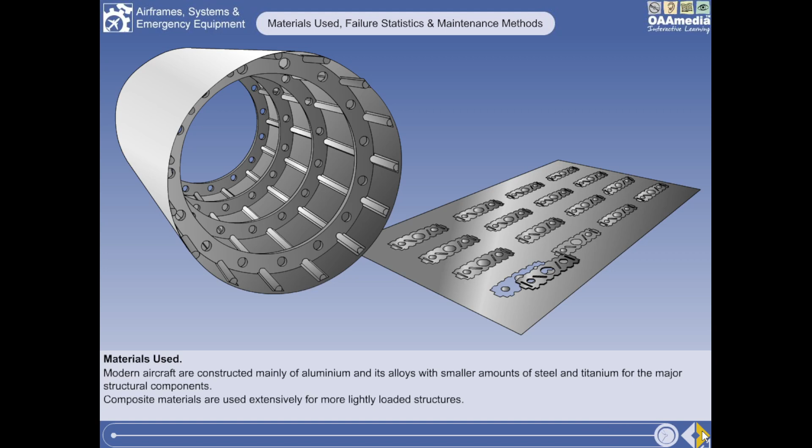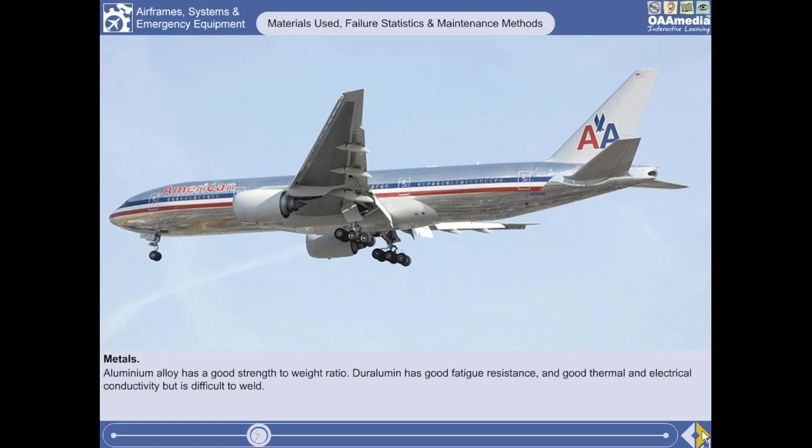Aluminium alloys are the most widely used metals for structural use due to them having a good strength to weight ratio. Duralumin is an aluminium and copper-based alloy which has poor corrosion resistance except when clad with pure aluminium. It has good thermal and electrical conductivity and good fatigue resistance, but it is difficult to weld. Aluminium-clad duralumin is the most popular material in use for airliner skins.

Steel and its alloys are relatively heavy, but can be made very strong. They are used only where strength is vital and weight can be ignored, for instance, in undercarriage units.

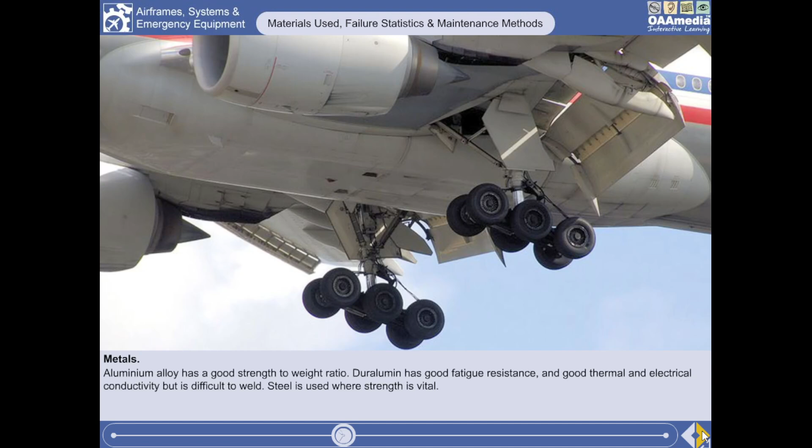Titanium is much lighter than steel, but it is just as strong and can be used where fire protection is required, for instance in engine firewalls. Titanium has good strength, and it retains this strength and its corrosion resistance up to temperatures of 400 degrees Celsius. It is, however, expensive to produce.

The SR-71 Blackbird was the first aircraft to make extensive use of titanium within its structure, paving the way for its use in modern fighter and commercial aircraft. The Boeing 777 uses some 58 tons of titanium in its construction.

Magnesium alloys are also used, their principal advantage being weight. Magnesium alloy has an excellent strength to weight ratio, aluminium of the same strength being 1.5 times heavier. Magnesium alloy has poor elastic properties, so its use in primary structures is limited. It is often used in the construction of gearboxes.

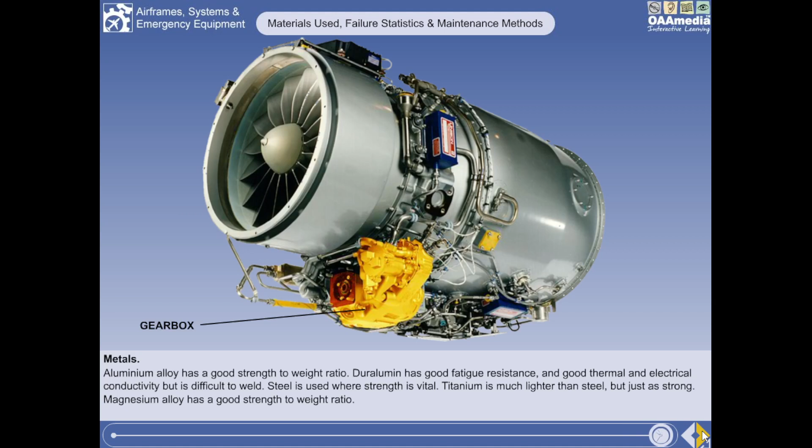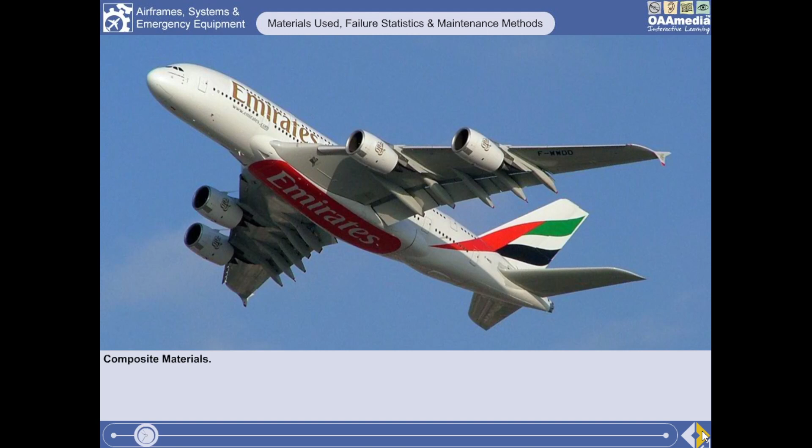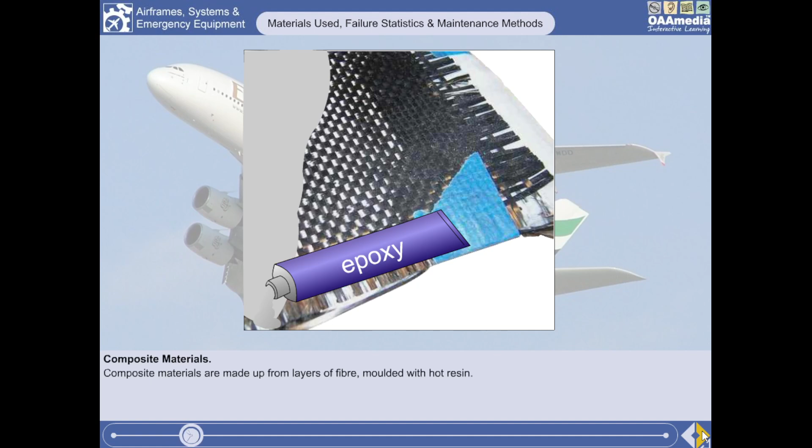Composite materials are becoming more and more used in aircraft construction. They are made up from layers of fibre, carbon, glass or Kevlar, moulded into the required shape with a hot plastic resin, which is normally epoxy.

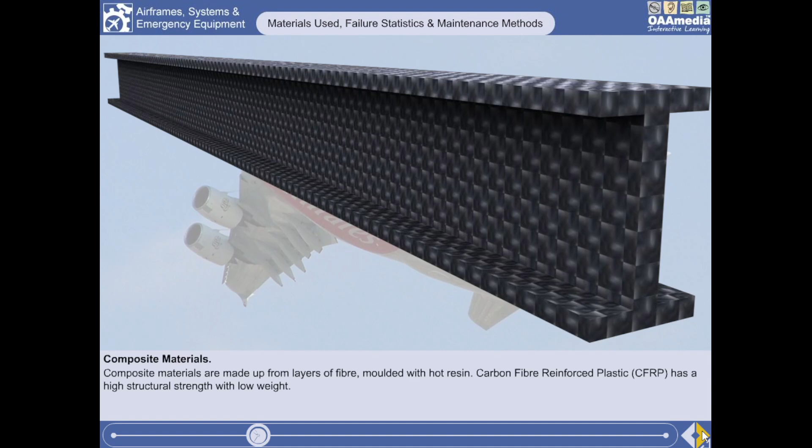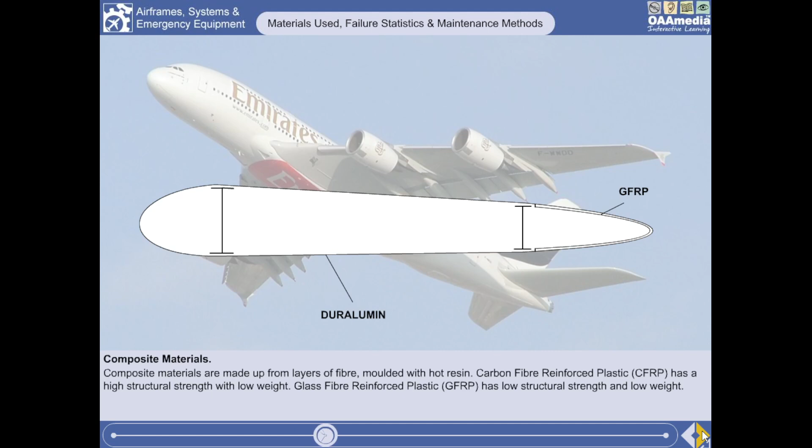Carbon fibre reinforced plastic is used where structural strength is required. It can be produced with the same strength as an aluminium alloy, but with a weight saving of about 20%. Glass fibre reinforced plastic does not have the same structural strength, but is often used for fairings and non-load-bearing panels because of its light weight.

Kevlar has very low electrical conductivity and high fire resistance. Aircraft cabin doors, overhead bins, and bulkheads may be built with honeycomb cores made up of Kevlar.

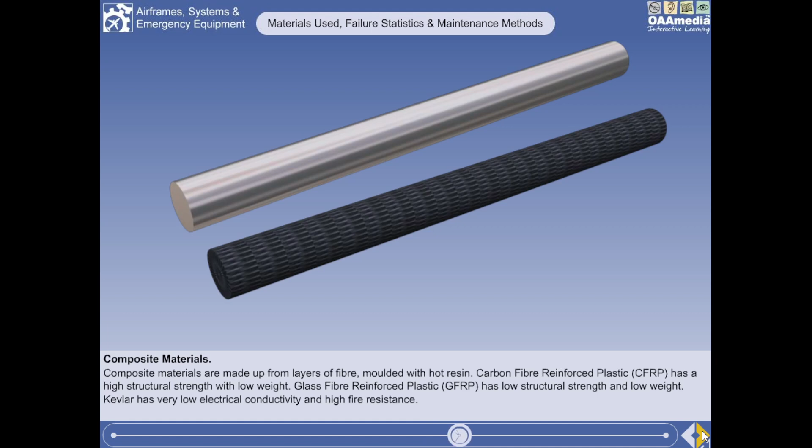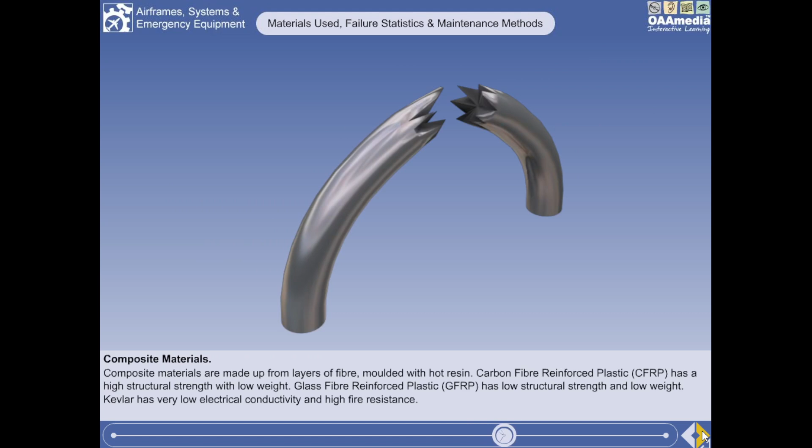Composite materials have good resistance to corrosion and can be easily formed into complex shapes, but their fatigue behavior is different to that of conventional metal alloys. Metal structures suffering fatigue retain their design strength up to a critical point, after which failure occurs very rapidly, whereas composites lose their properties gradually.

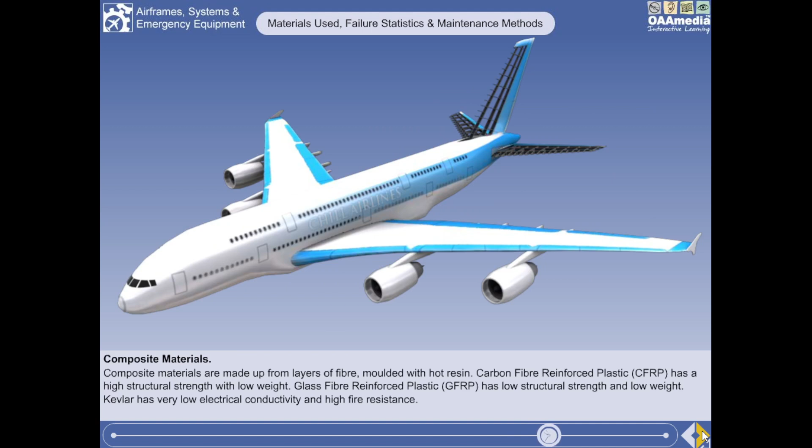Interest in composites for structural use is due to their high specific strength and specific stiffness allied with their ability to retain these properties at high temperatures. The Airbus A380 uses a significant amount of composite material in its construction. The tailplane, for instance, is almost entirely constructed from carbon fiber reinforced plastic.

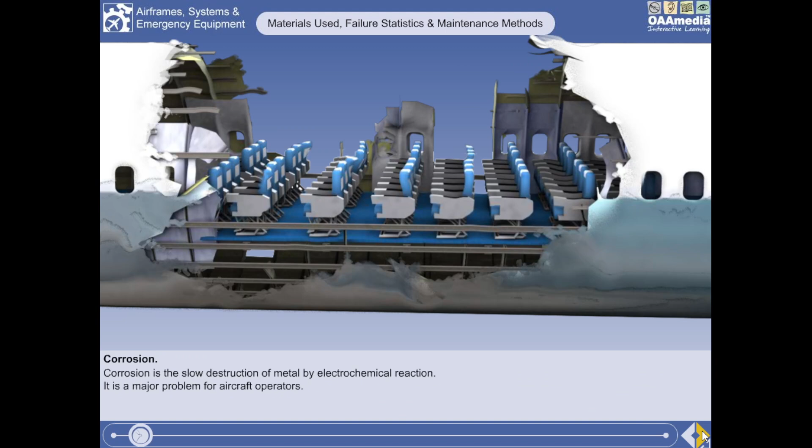Corrosion is the slow destruction of metal by electrochemical reaction. It is one of the most persistent defects found in aircraft. Rectification of advanced corrosion has been known to take thousands of man-hours. In fact, more than 10% of engineering downtime is spent in dealing with corrosion problems. It is therefore essential that it is recognized at the earliest possible stage, and that effective preventative measures are taken.

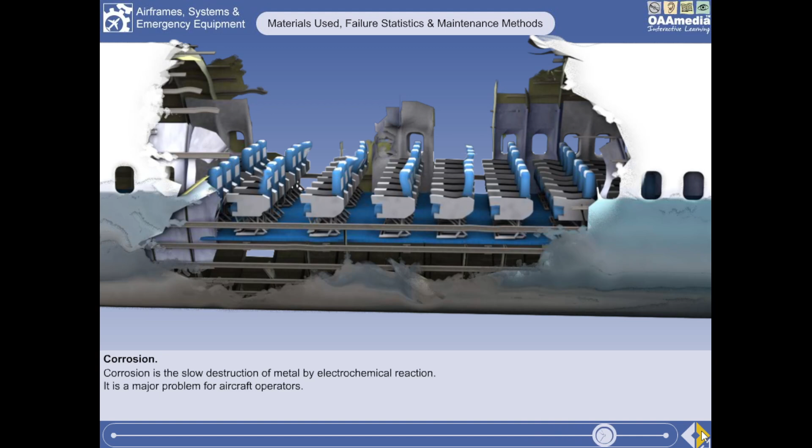When a metal is exposed to the air, oxygen in the air reacts with the bare metal to form an oxide film which adheres to the metal surface. This oxide film forms a barrier between the air and the metal surface, which can protect the underlying metal from further attack.

A good example of this is the Statue of Liberty. It is clad in copper. This has developed a green copper oxide coating which protects the metal from the elements.

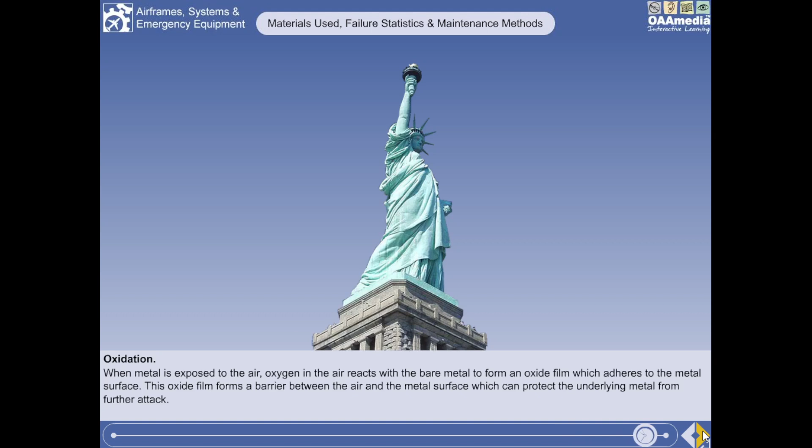With the exception of oxidation, all other corrosion takes place when the metal is in contact with water, either as a liquid or as water vapor in the atmosphere. Corrosion is mainly electrochemical in character and occurs in conditions that permit the formation of minute electrical cells in or on the attacked metal in the presence of an electrolyte.

It will also occur when a difference in potential exists between the different constituents of an alloy, or where dissimilar metals are in contact with each other.

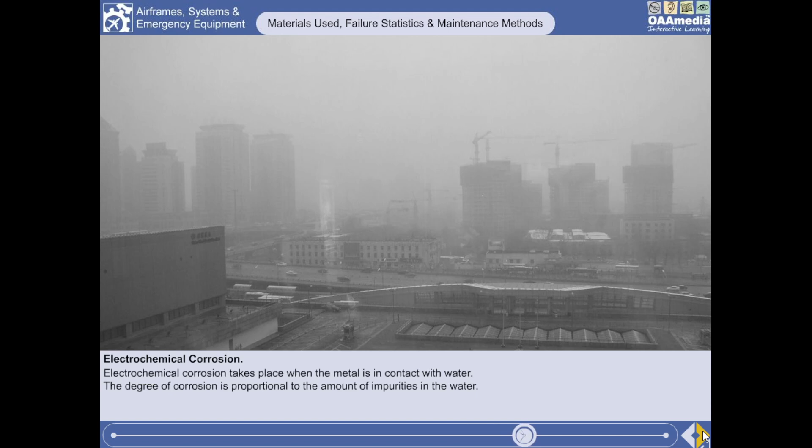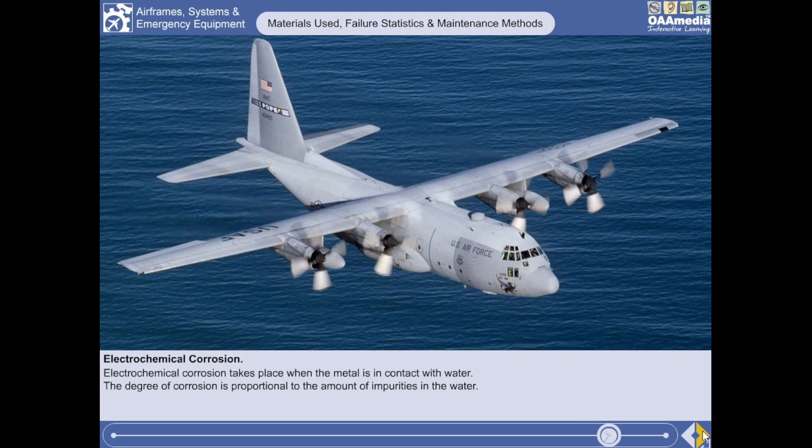The degree of corrosion is proportional to the amount of impurities in the water, the impurities being due to industrial pollution which has high sulfur content, or by airborne salt particles when operating over the sea. The resultant action is that the metal undergoes a chemical change.

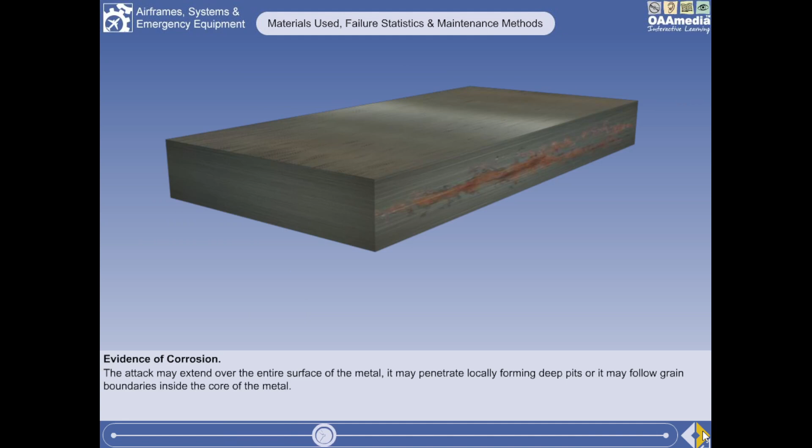The attack may extend over the entire surface of the metal, or it may penetrate locally, forming deep pits, or even follow grain boundaries inside the core of the metal. The weakening effect can be aggravated by stresses in the metal due to external loads, or there may be residual stresses from the manufacturing process or method of assembly.

The three types of corrosion that we are going to look at are surface corrosion, intergranular corrosion, and stress corrosion.

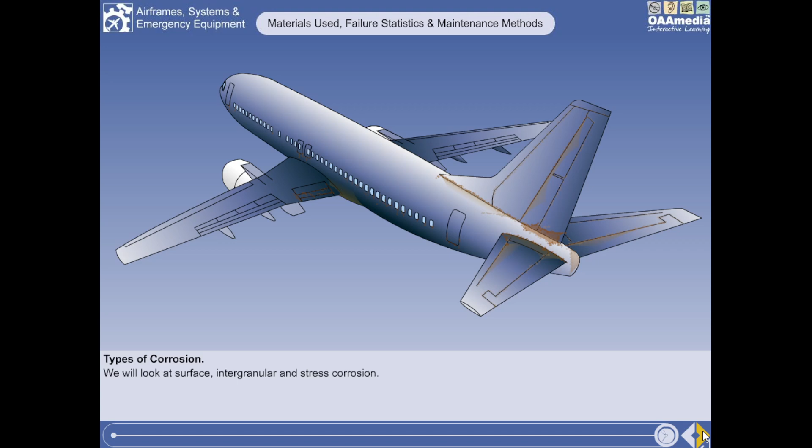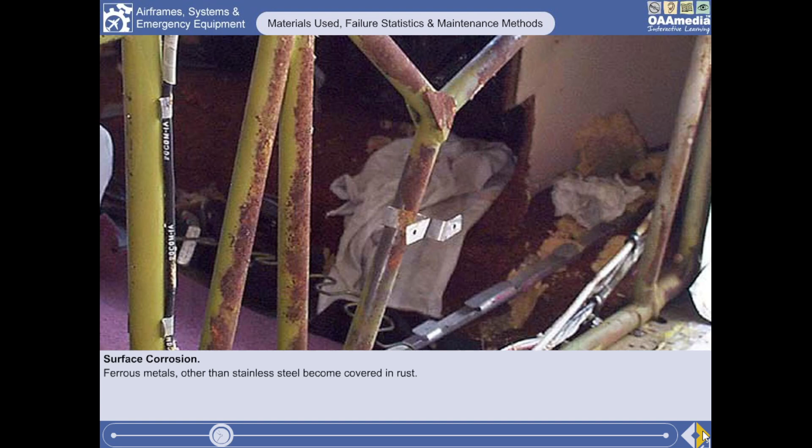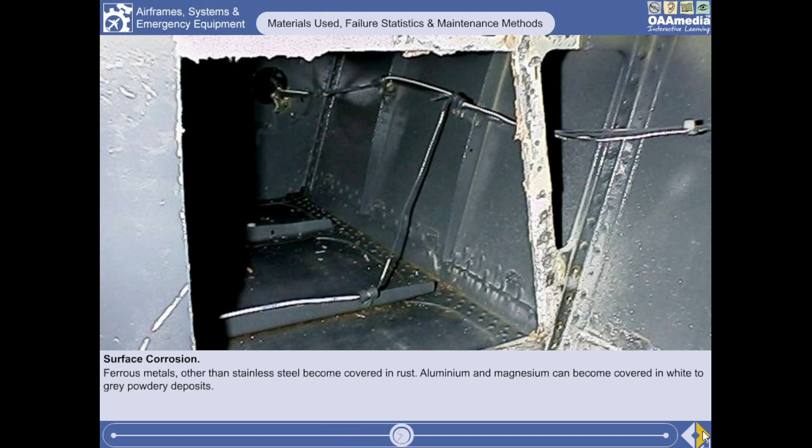The surface corrosion on ferrous metals, other than stainless steel, can be recognized as a reddish-brown powder, commonly known as rust. The surface of aluminium or magnesium can become covered in white to grey powdery deposits. On magnesium, there may also be deep pitting of the surface. The surface of copper and its alloys may become covered in blue-green salt deposits.

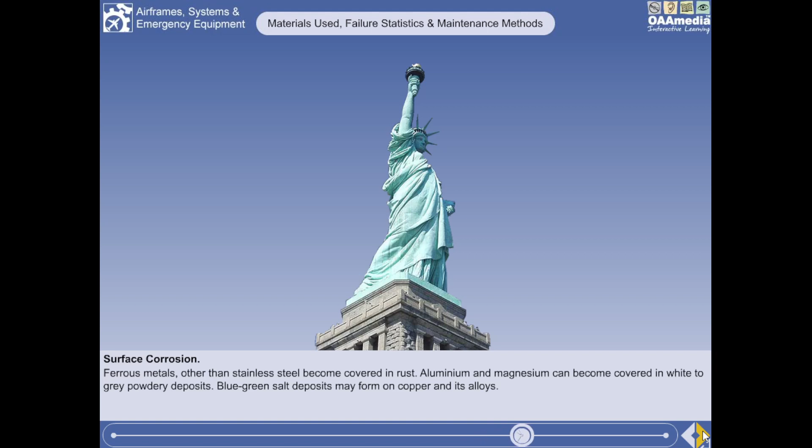Surface corrosion is the least damaging. It is relatively easy to spot, so it can be identified and dealt with at an early stage.

The microstructure of metals and alloys is made up of crystals or grains, separated by grain boundaries. Intergranular or intercrystalline corrosion is a localized attack along the grain boundaries, or immediately adjacent to grain boundaries, while the bulk of the grains remain largely unaffected. It penetrates the core of the metal along the grain boundaries. The rate of attack is not limited by the lack of oxygen and is accelerated if applied or residual stresses are present.

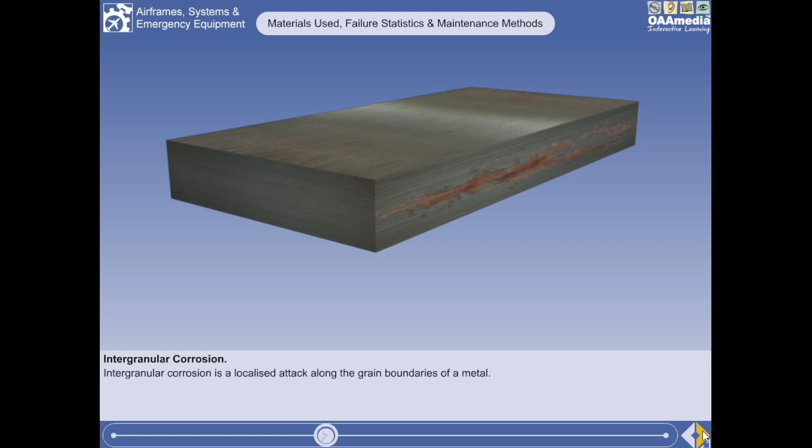Repeated, fluctuating stresses cause separation of the grain boundaries, accelerating the spread of corrosion. As a result, higher stress concentrations can occur in the remaining sound material, thus producing cracks which can spread, leading to component failure.

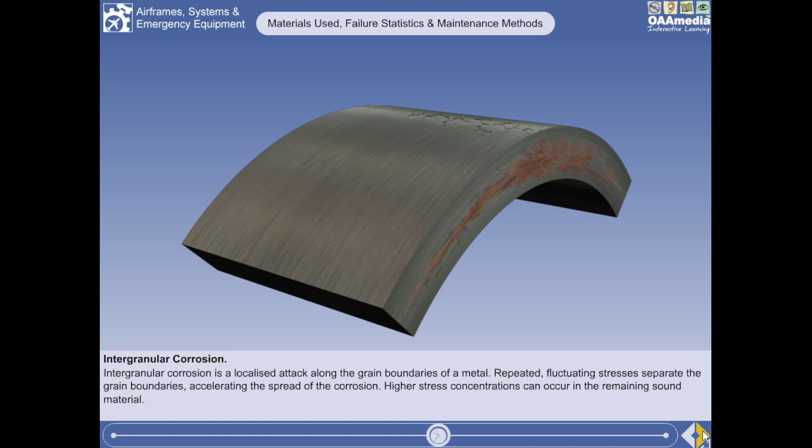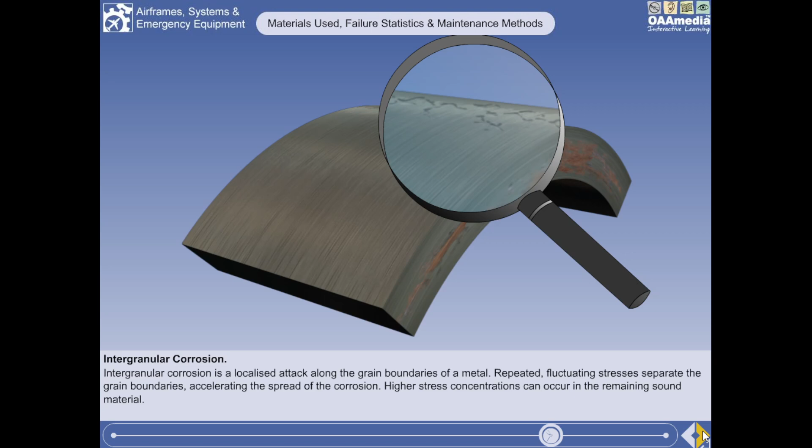This is a very dangerous form of corrosion, as detection is difficult and serious weakening can occur before any external evidence is visible. The only surface indication may be a series of hairline cracks, probably only visible through a magnifying glass.

There is no effective method of determining or of limiting the loss of strength which will occur with this type of corrosion, so when it is detected, the affected part must be immediately rejected.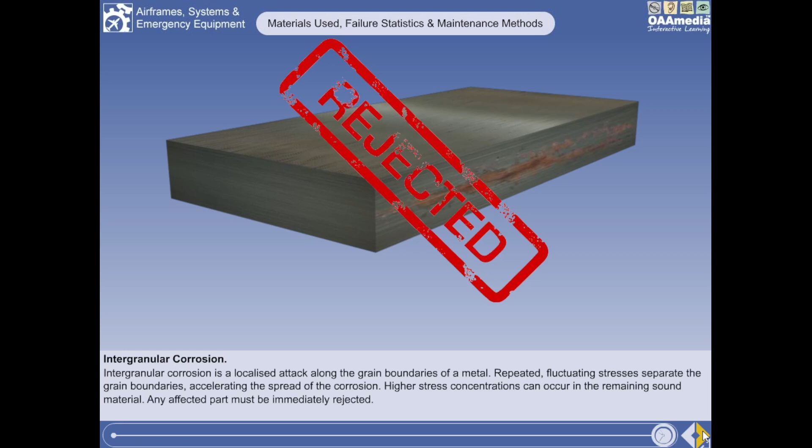A combination of a steady tensile load and corrosive environmental conditions produce a form of metal fatigue known as stress corrosion cracking. The stresses may be built in during manufacture, introduced during assembly, or may be applied during operation.

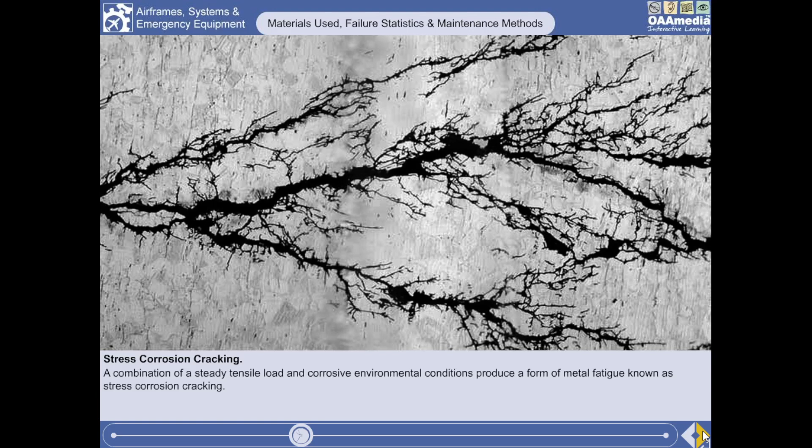Metal under stress corrodes more rapidly than unstressed metal. It usually begins with pitting at the surface. This increases the stress at the pit, causing a crack which can extend under the combined action of corrosion and load until failure occurs.

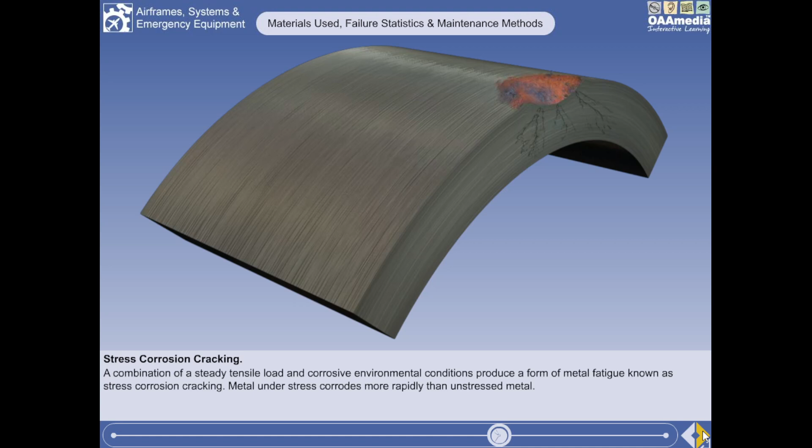There is generally very little evidence of corrosion and no apparent loss of metal. This type of corrosion is often not spotted until a serious failure occurs.

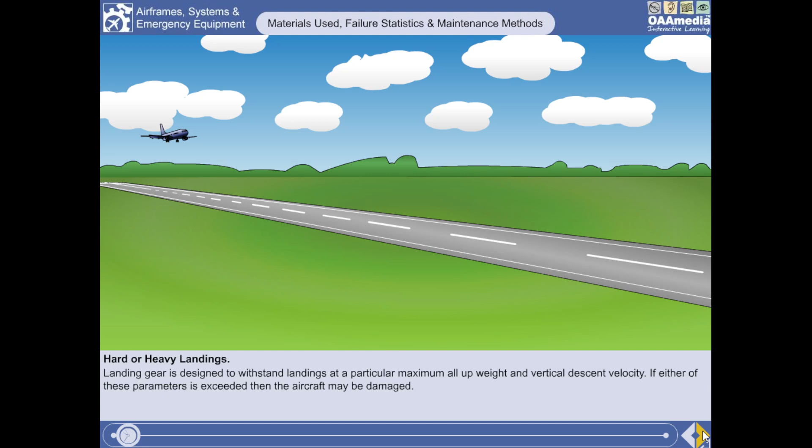An aircraft's landing gear is designed to withstand landings of a particular maximum all-up weight and a maximum vertical descent velocity of 10 feet per second or 3.05 meters per second. If either of these parameters is exceeded during a landing, then the aircraft may be damaged.

Damage may also be caused to some aircraft by landing with drift applied, or by touching down with the nose or tail wheel first.

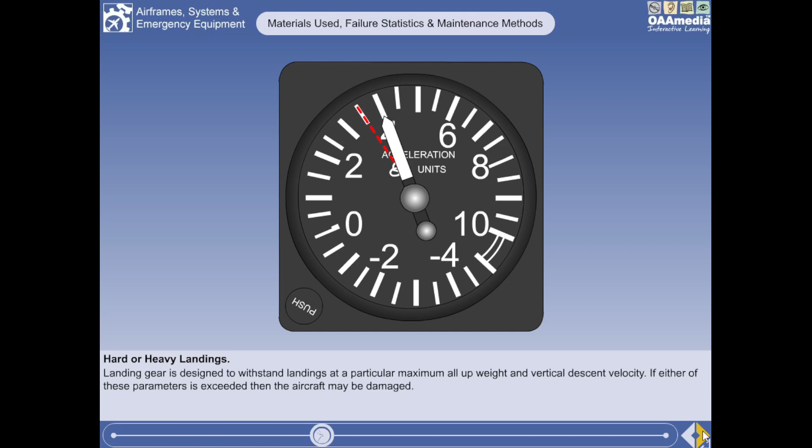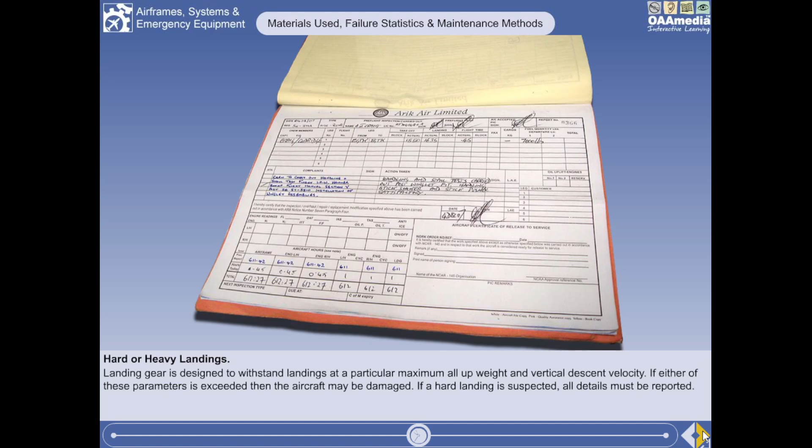Some aircraft are fitted with hard landing indicators, which give a visual indication that specific G-forces have been exceeded. But in all cases, if the crew suspect that a hard landing has been made, then all details, including aircraft weight, fuel distribution, landing speed, rate of descent, and any noises indicative of structural failure, must be reported so that an inspection can be carried out prior to the next takeoff.

The damage which may be expected following a hard landing will be concentrated around the landing gear, its supporting structure in the wings and fuselage, around the wing and tailplane attachments, and the engine mounts.

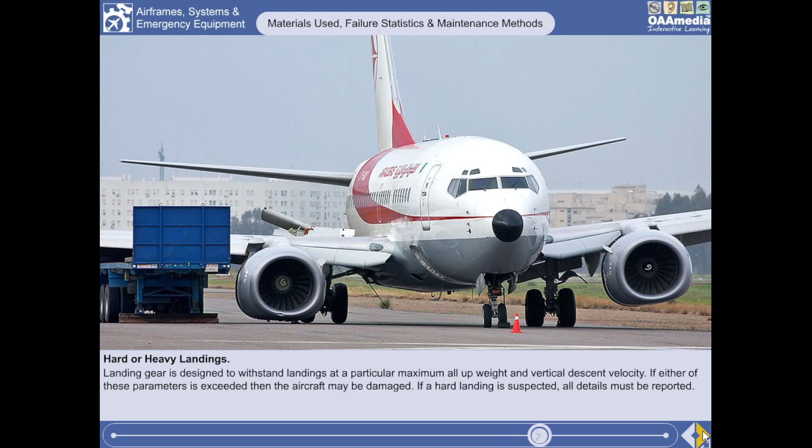Secondary damage may be found on the fuselage skin and structure, depending on the configuration and loading of the aircraft. On some aircraft, it is specified that if no damage is found in the primary areas, then the secondary areas do not need to be inspected. However, the precise inspection requirements vary from aircraft to aircraft, so reference must be made to the appropriate maintenance manual.

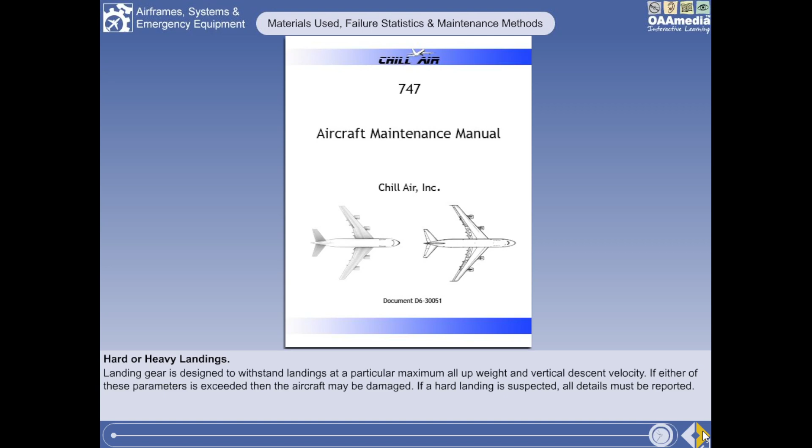It is important for pilots to have an understanding of the fail-safe concept and the way it is designed into modern aeroplanes. The following is a summary of the required relationship between component failures, their effect, and the possibility of them happening as required by the certification specifications from EASA, as detailed in CS25.

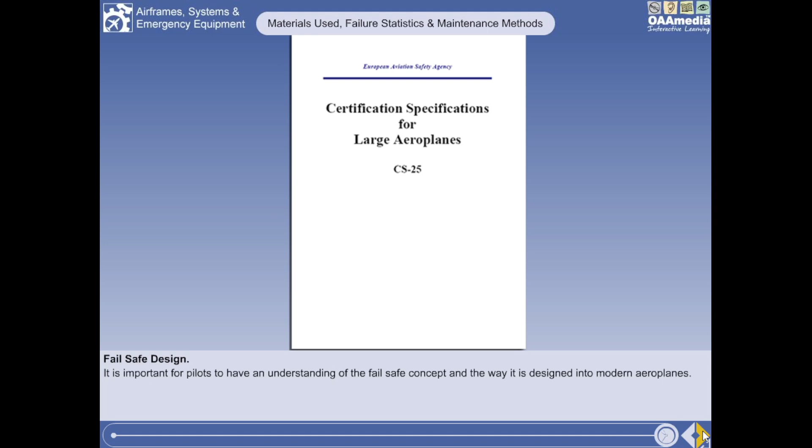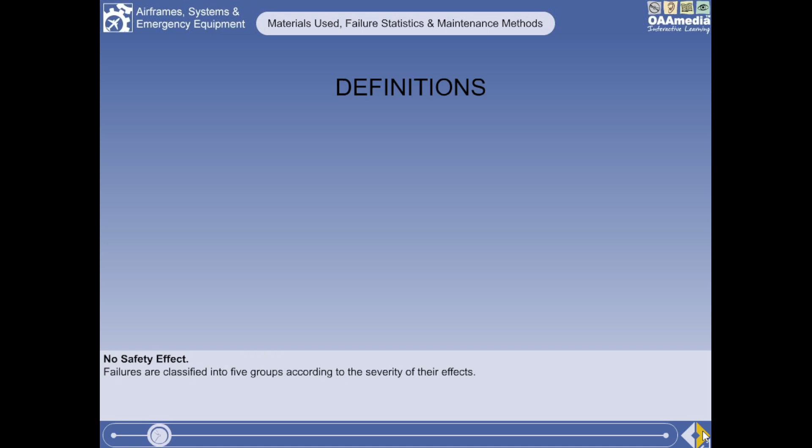Failures are classified into five groups, according to the severity of their effects. The lowest class is no safety effect. This is self-explanatory: it will have no effect on the operation of the aeroplane.

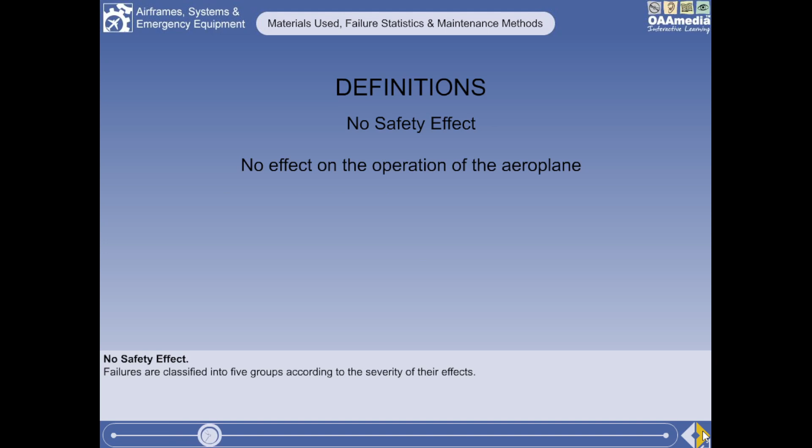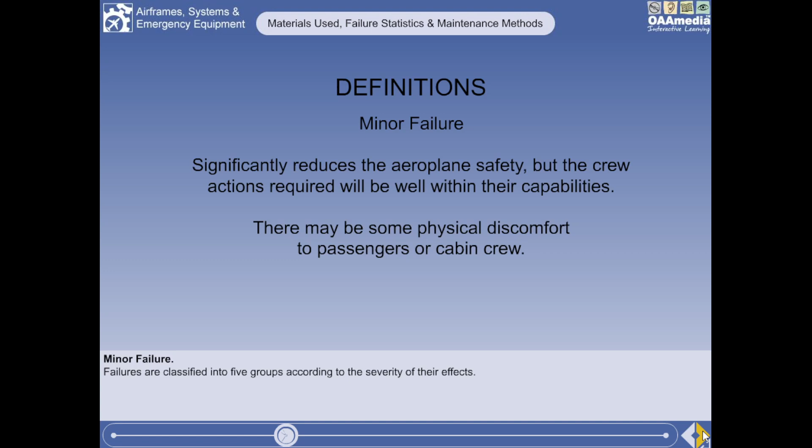Next is minor failure. This failure condition will significantly reduce the aeroplane's safety, but the crew's actions required will be well within their capabilities. There may be some physical discomfort to passengers or cabin crew.

Third is a major failure. This will lead to a significant reduction in safety margins or functional capabilities, a significant increase in crew workload, possible flight crew discomfort, and possible physical distress, including injury to passengers or cabin crew.

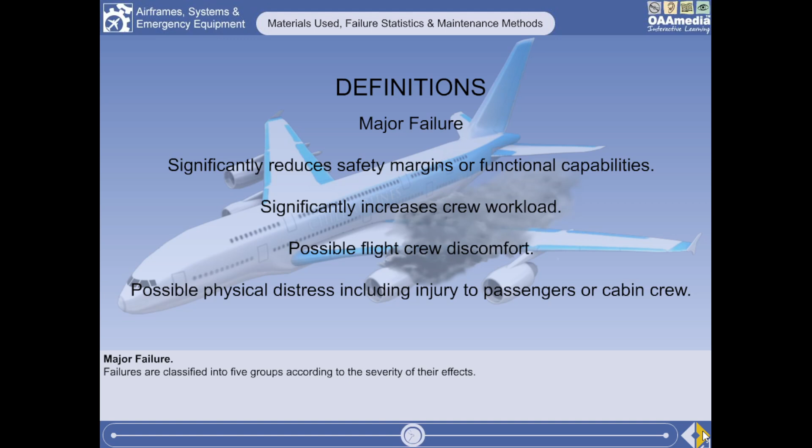A hazardous failure will reduce the capability of the aeroplane or crew to cope to the extent that there will be a large reduction in safety margins. The conditions may cause physical distress to the flight crew so that they are unable to perform their required tasks accurately or completely. There may be serious or fatal injuries to a small number of passengers or cabin crew.

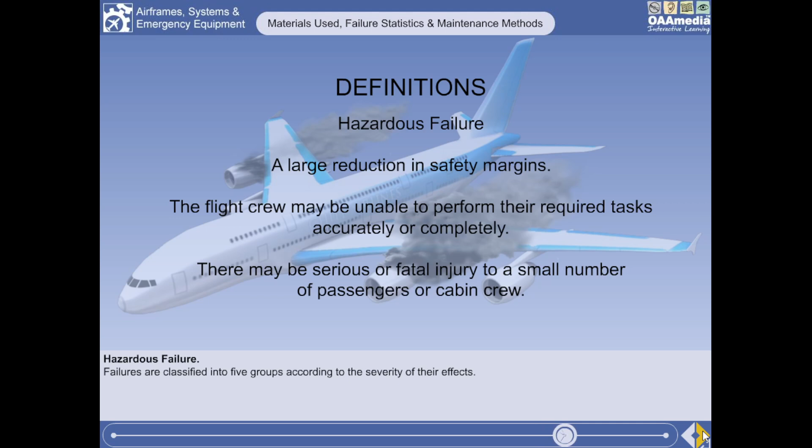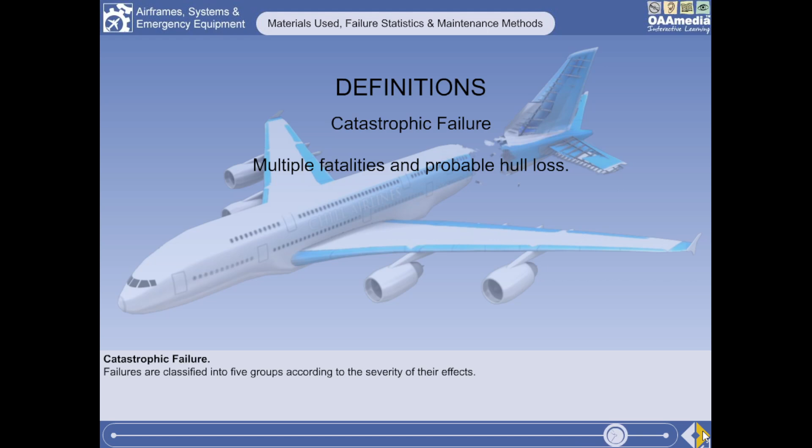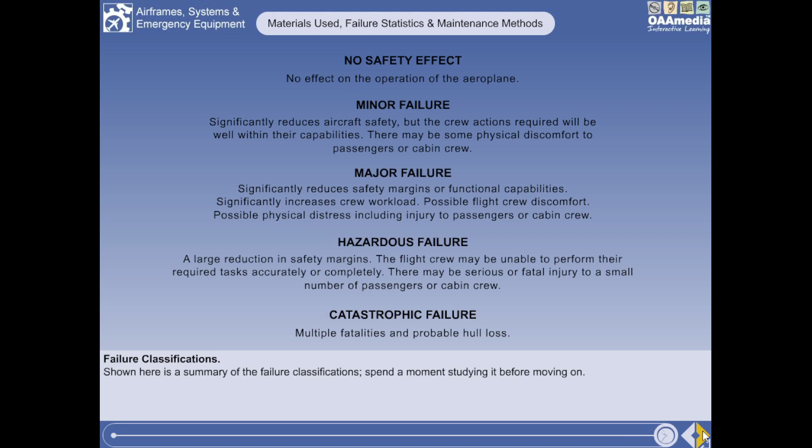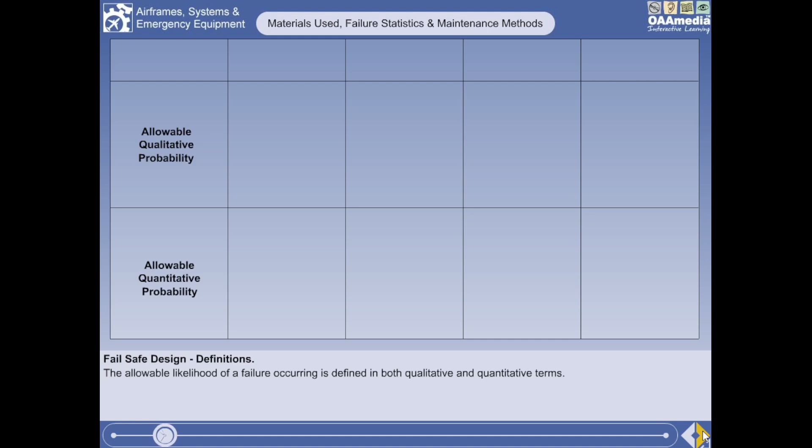The allowable likelihood of a failure occurring is defined in both qualitative and quantitative terms. A probable failure condition is one which is expected to occur one or more times during an aeroplane's lifetime, or less often than once every 1,000 flight hours.

A remote failure condition is unlikely to occur to each aeroplane during its life, but it may occur several times when considering the life of a number of aeroplanes of the same type, or it may occur less often than once every 100,000 flight hours.

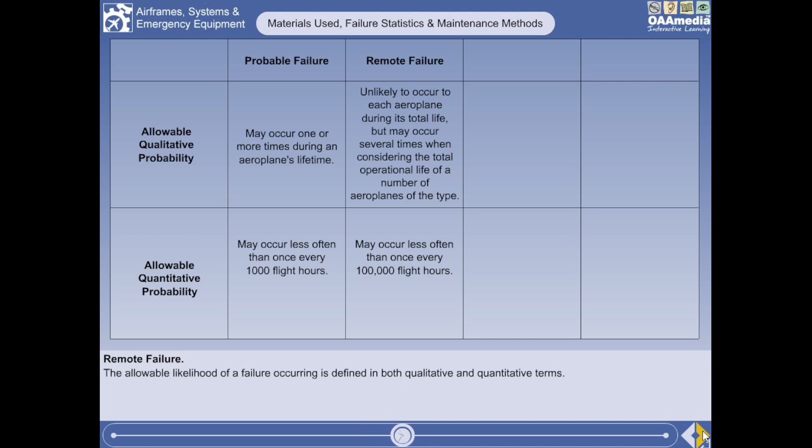Extremely remote failure conditions are not expected to occur to each aeroplane, but they may occur a few times when considering the total life of all aeroplanes of the same type, or they may occur less often than once every 10 million flight hours.

Extremely improbable failure conditions are so unlikely that they are not expected to occur during the entire operational life of all aeroplanes of one type, or less often than once every 1,000 million flight hours.

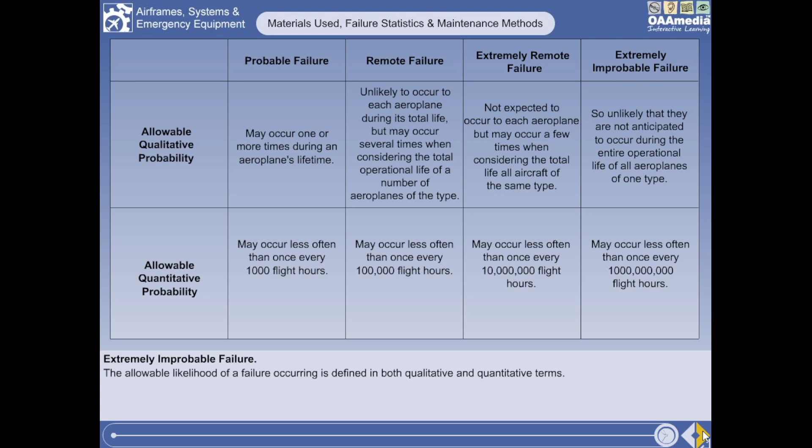The simple rule is that the more severe the outcome of a failure, the less likely must be the possibility of it happening.

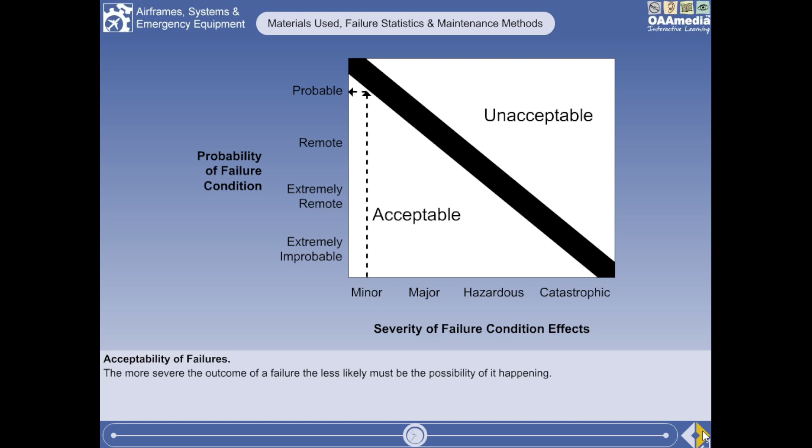As you can see from the chart, a catastrophic failure must be extremely improbable, whilst a minor failure may be probable. Spend a moment studying this chart. It shows in diagrammatic form the required relationship between the probability and severity of failure conditions.

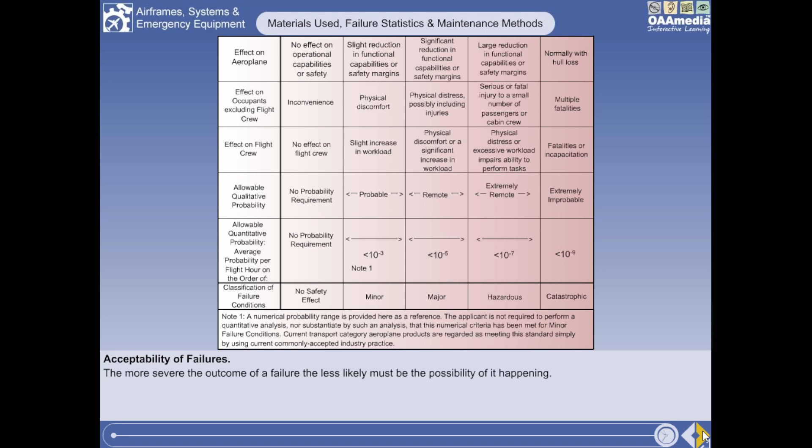As well as obeying the rules about the probability of failure, modern aeroplanes are designed around the fail-safe concept. The basic objectives used to achieve this are that a single failure of any single element of any system or subsystem should be assumed. This failure must not be catastrophic.

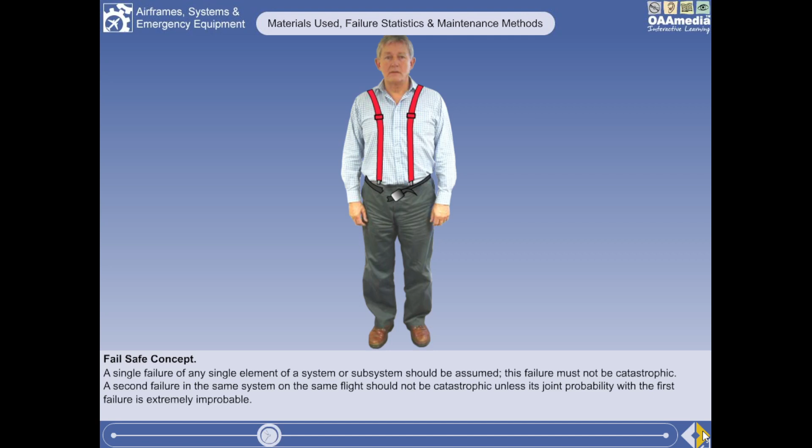A second failure in the same system on the same flight should not be catastrophic unless its joint probability with the first failure is extremely improbable. In order to achieve this, the fail-safe design concept uses one or more design principles or techniques to ensure a safe design.

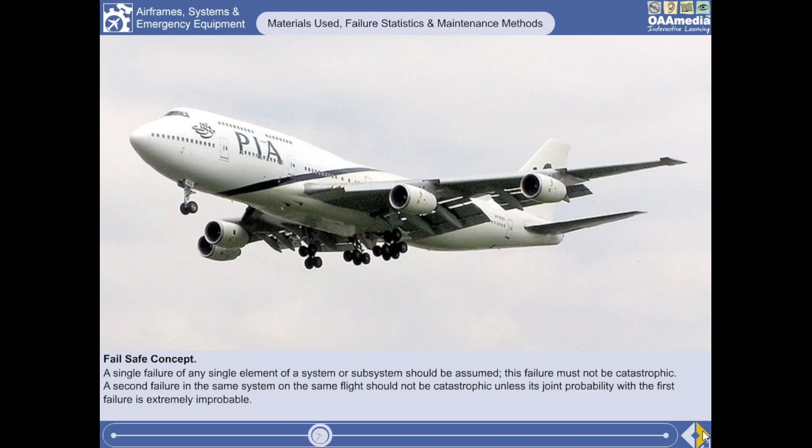Redundancy and backup systems are used to enable continued function after failure of one or more systems. A good example of this is the use of multiple engines.

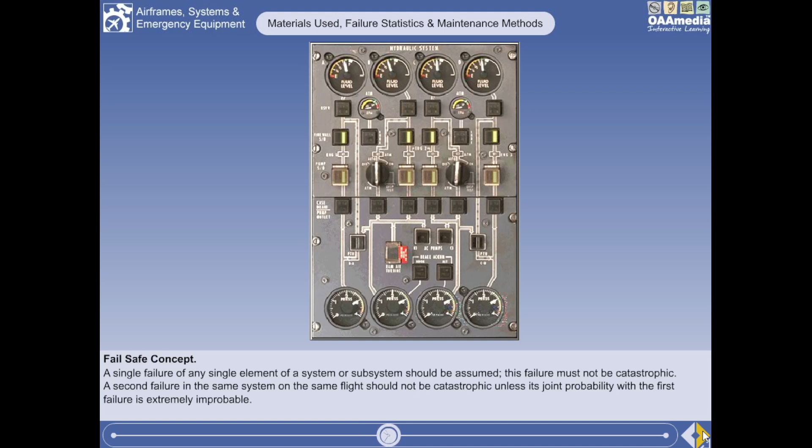Systems and components are isolated and segregated so that failure of one does not cause failure of another. For instance, aeroplanes are designed with multiple independent hydraulic systems, with no transfer of fluid between them.

Systems are tested for proven reliability, so that multiple independent failures are unlikely to occur on the same flight. Airlines using large twin-engine aeroplanes for extended range operations have to continually monitor and prove their engine reliability in order to be allowed to operate.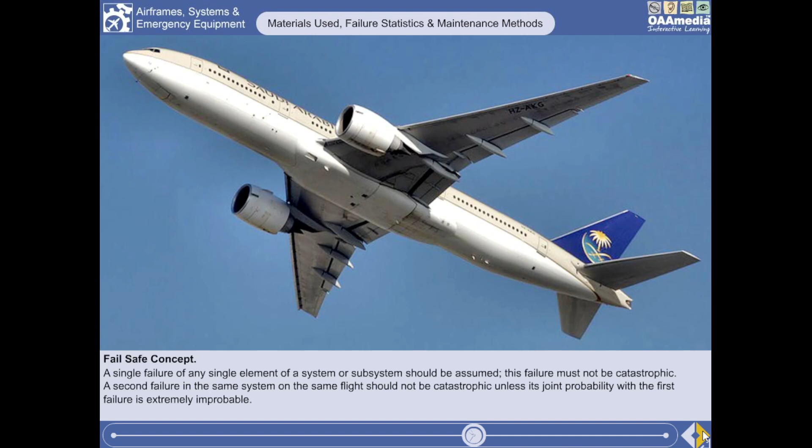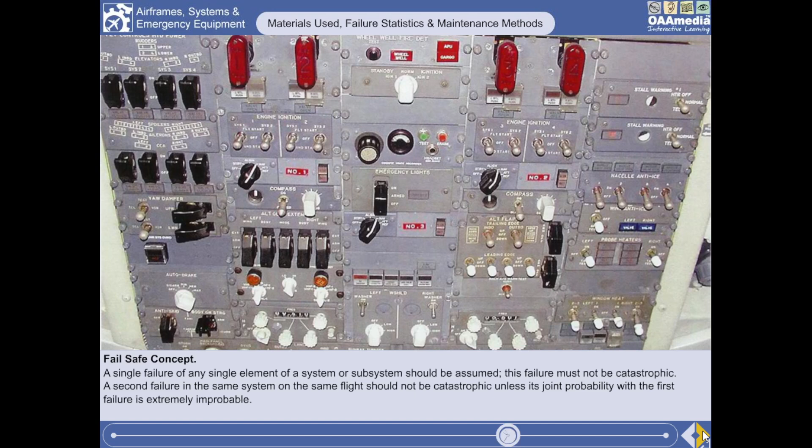Failure warning systems are provided for the crew to be made aware of such failures. Flight crew procedures are developed to limit the effect of any failure. A checking system is used to ascertain a component's condition.

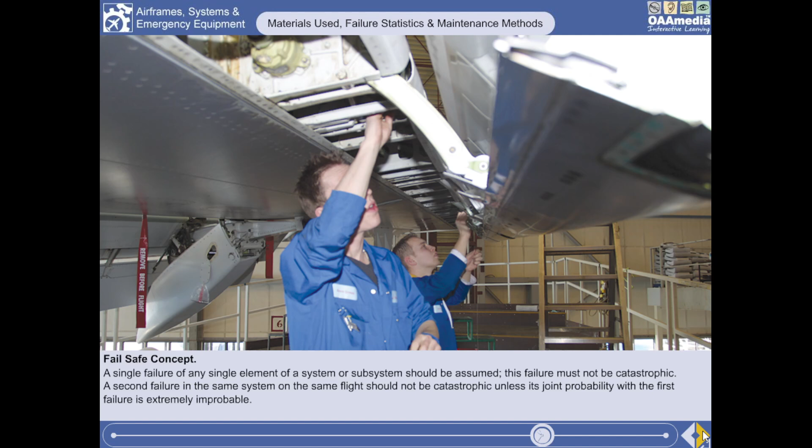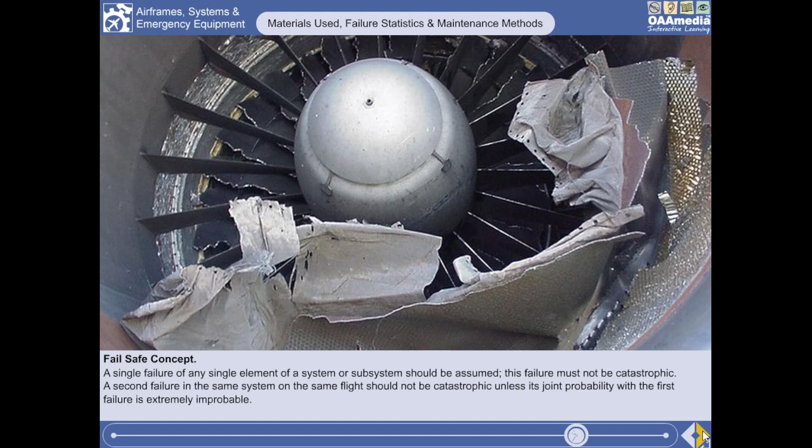Components are designed to sustain damage without failing, or to direct the effects of a failure in a way that limits its safety impact. And lastly, components are designed with margins beyond their planned life.

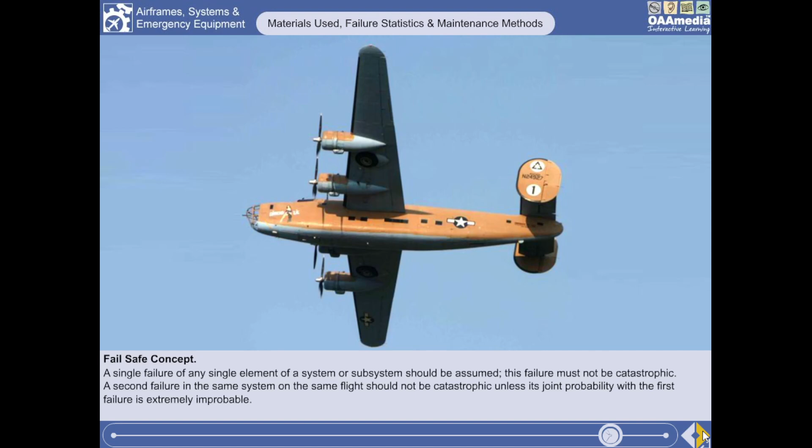On the screen is a summary of the design principles and techniques used to produce fail-safe aeroplanes. Spend a moment studying it before moving on.

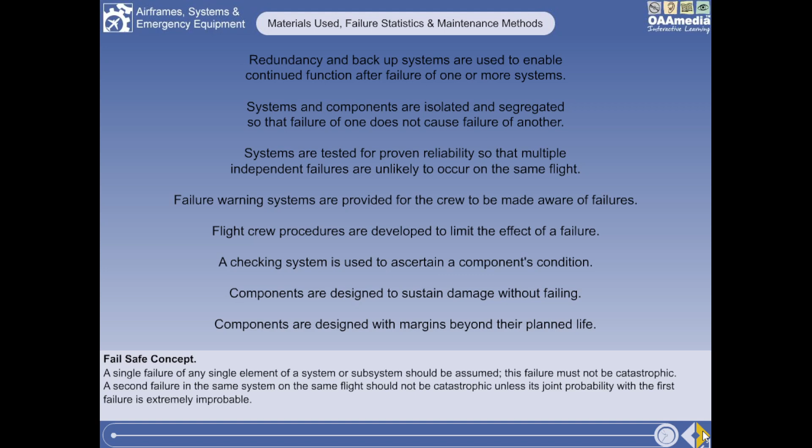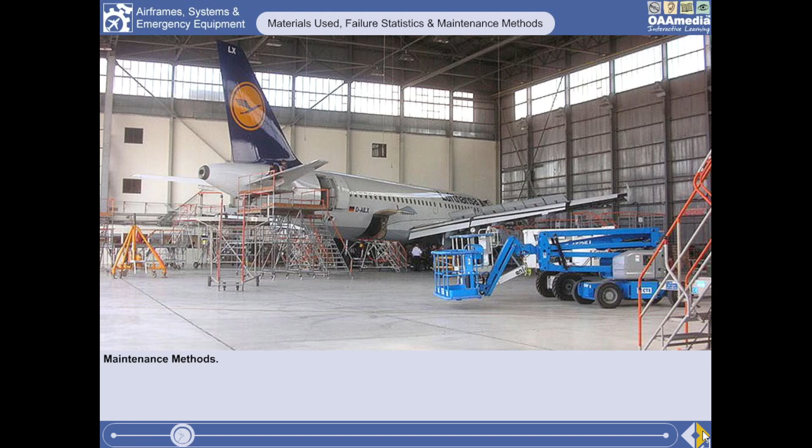For aircraft structures and components, there are two maintenance methods in common use: hard-time maintenance and on-condition maintenance. Hard-time maintenance is a preventative primary maintenance process. It requires that an appliance or part be periodically overhauled in accordance with the company's maintenance manual, or that it be removed from service. An example of this would be a part that must be removed from the aircraft after X amount of flight hours or calendar years for an overhaul, or disposal if it is a non-repairable item.

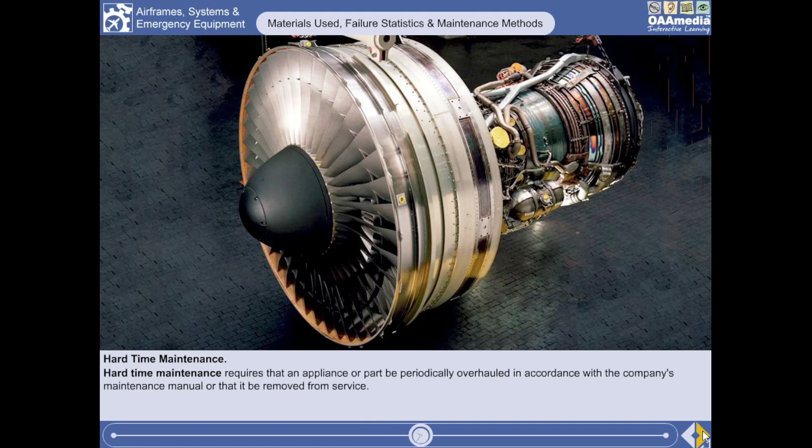On-condition maintenance is also a preventative primary maintenance process. It requires that an appliance or part be periodically inspected or checked against some appropriate physical standard to determine whether it can continue in service. The purpose of the standard is to remove the unit from service before failure during normal operation occurs.

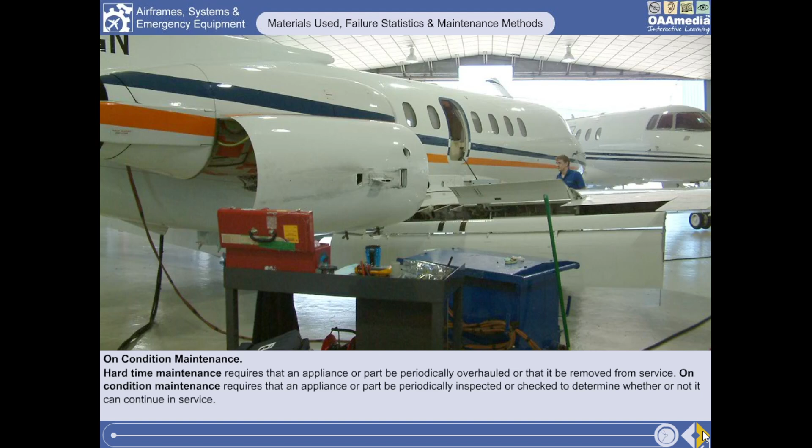That ends this lesson. You should now be familiar with the various materials used in aircraft construction and the advantages and disadvantages of each material.

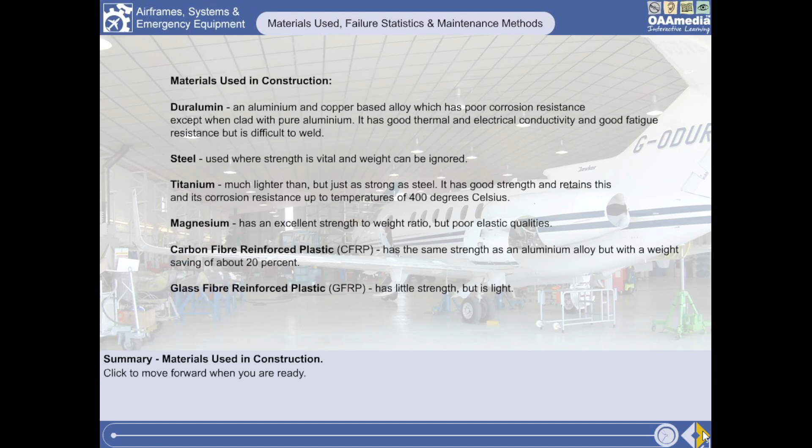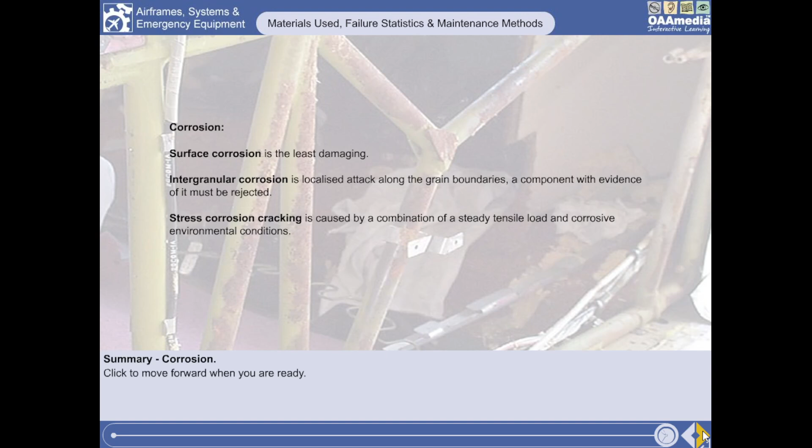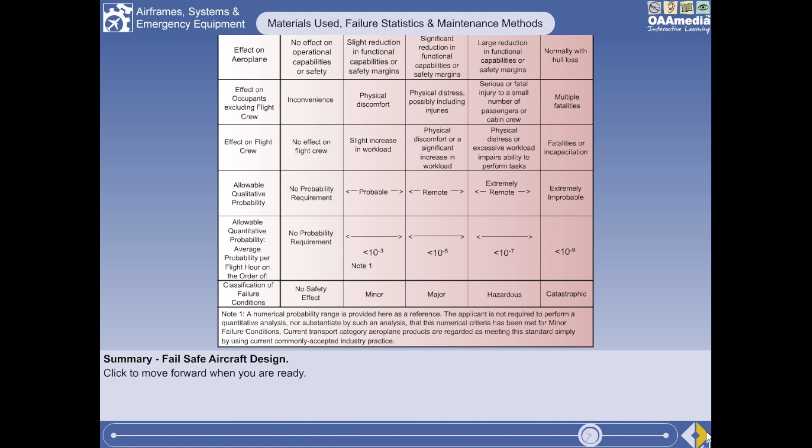You should know the causes and effects of corrosion. You should understand the effects of a hard landing. And you should have a good knowledge of what constitutes a fail-safe aircraft design. Finally, you should understand the difference between hard time and on-condition maintenance.